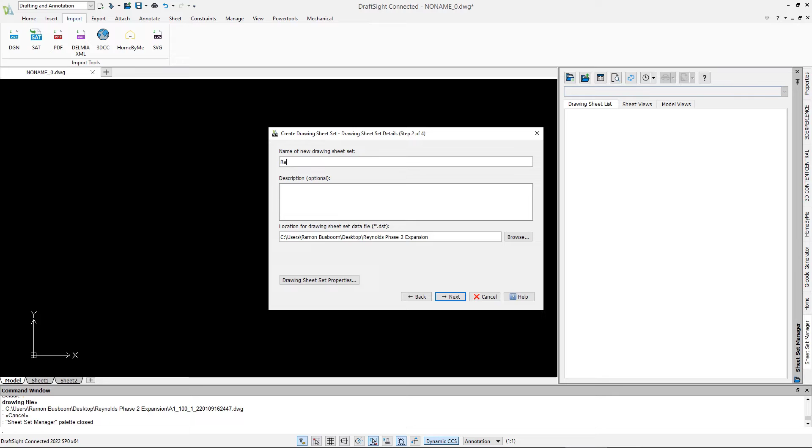So in order to help organize those, we're just going to create a new sheet set. We're going to turn on the sheet set manager, create a new one, and give it a name. We're going to do existing files, and choose that same directory, and then you can see the directories that are importing.

If you've never used sheet sets, it's a way to really help organize a lot of drawings into a set. It has some numbering capabilities. You can control properties that could be filtered down in a title box directly from here. You can rename either the drawing or even the layouts directly from here. So it's really kind of an organizational method.

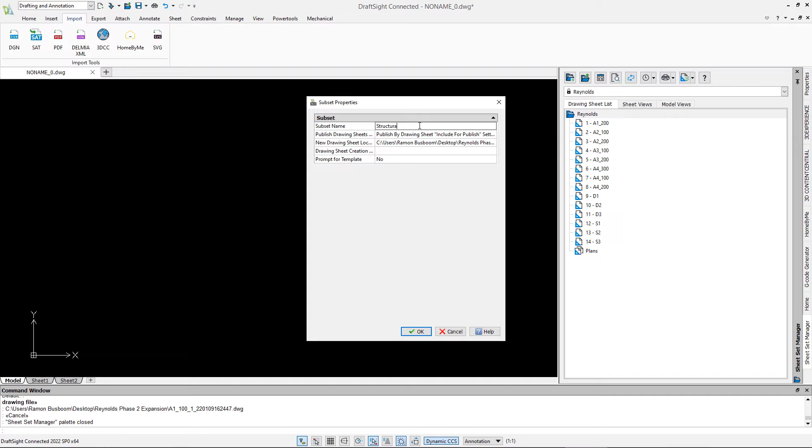In this example, I'm going to create a couple quick subsets in order to further organize this into a tree structure. If you've got multiple designers that all need these files, this is taking a little bit of workup time, but this is going to help organize all the as-is files that you receive from the builder or owner. So as you can see, this is organized now.

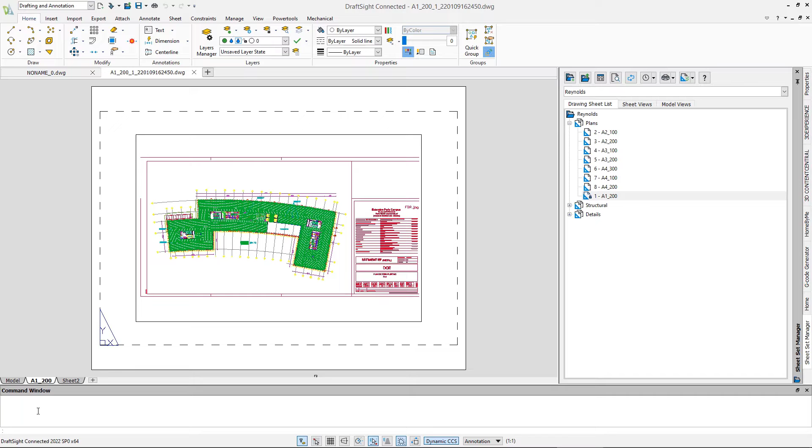Now I'm going to go ahead and open up that first drawing. It's going to open up in layout mode. Let's jump over to the model view and see what we got. So when we zoom into a little corner here, you'll notice I do have the entities. Those are just CAD entities that have been imported. The PDF layer option has definitely worked because all the PDF layers have come through.

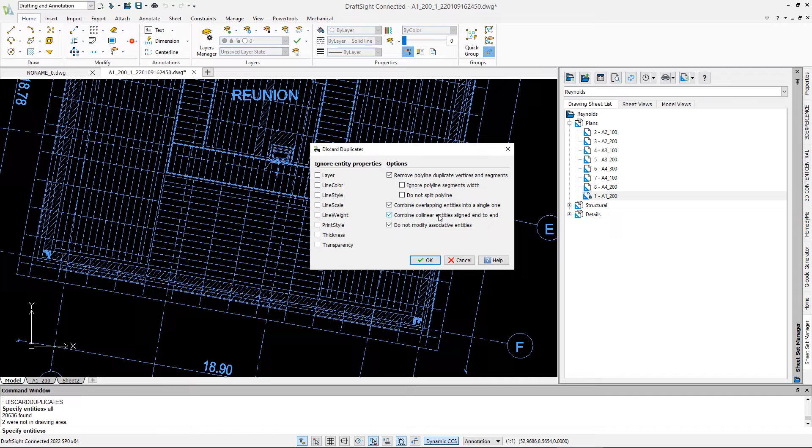Very common, again, I talked about this, is if you have overlapping entities. So what we're going to do is use the discard duplicate command. Now this is a pretty cool command because it not only looks at overlapping entities, but if you have lines that are the same but disjointed, yet aligned end to end, you can actually combine them. So we're going to go ahead and say OK to that. And if you notice the command prompt, it's removed 300 duplicates and combined almost over 500 overlapping entities for us.

All right, now that we have this kind of cleaned up, we're going to throw it over the wall to Bertrand. Thank you, Ramon, and hello everyone.

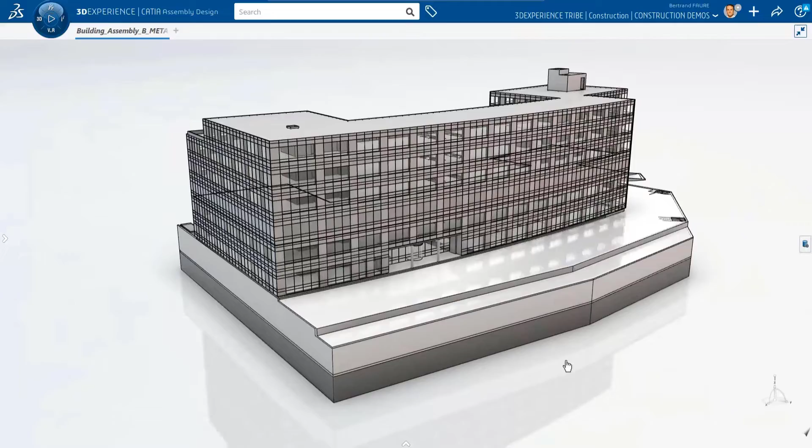What I'm showing now is the generation of the building in 3D. But before starting the geometry, it's important to explain that the data is organized in a logical way under a structure of data. And this is because many other colleagues will participate in this construction, and everyone must clearly know where he stands in the project.

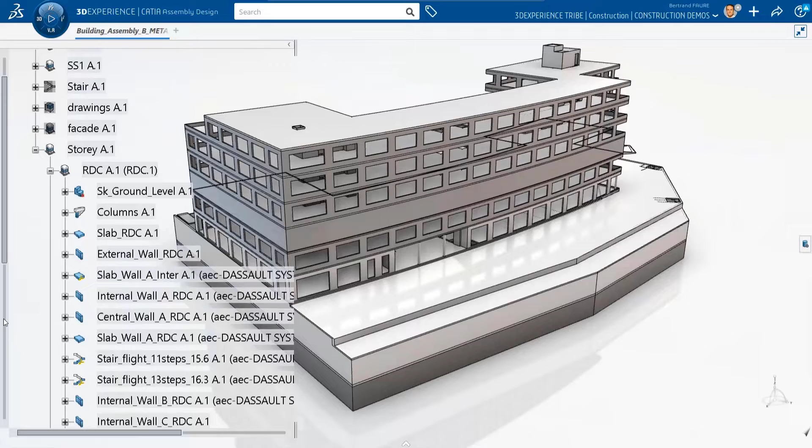And because the simplest is always the best, it's divided into stories like I'm showing now, then slab, walls, etc. Of course, the building is finished already, but I'm showing you how I would continue the modeling from the second level.

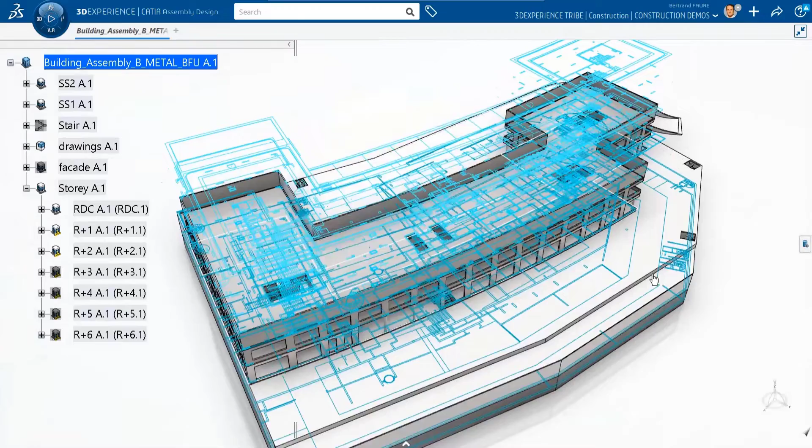What you see in blue is the different drawings imported from the architect's office and cleaned up on Draftsight. Why is it so important that the drawings are reworked? It's because they are going to be displayed in my 3D environment all together.

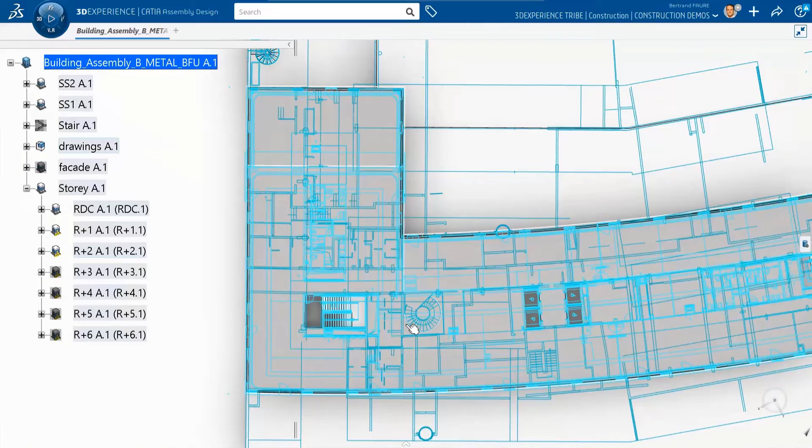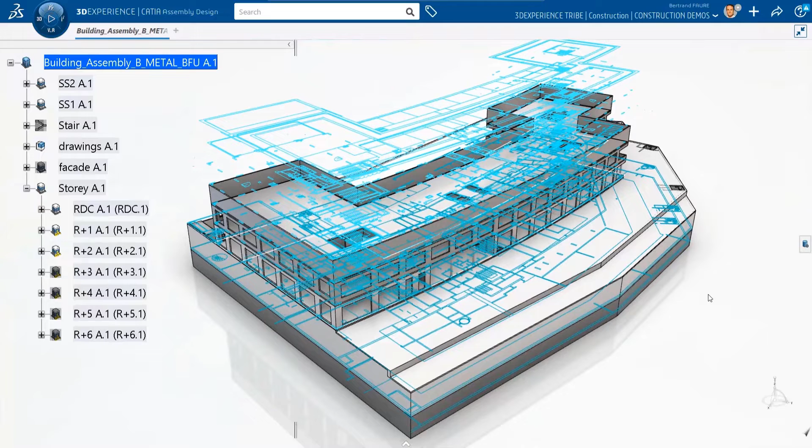For example, here all floor plans, at each level. Of course, I located them in 3D at the proper level, but still, it's going to create a very busy environment of work. And this is why it's so important that the drawings are cleaned up, so that they display properly exactly the information that is relevant for the purpose of 3D design. Of course, in CATIA, there are also filtering capabilities to help you do this work.

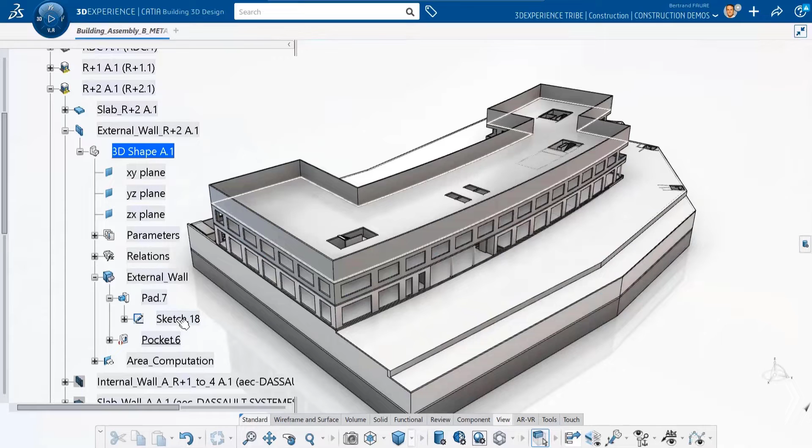The second reason why I'm so happy that Raymond cleaned up the drawing for me in Draftsight is because I'm going to use a profile to extrude the wall, for example, like I'm doing here. The 3D geometry will inherit from the quality of the profile, so the idea is to control the quality of the generated 3D. That's why it's important that the drawing is not directly the drawing given by the 2D designer, but really cleaned for the purpose of being reused in 3D.

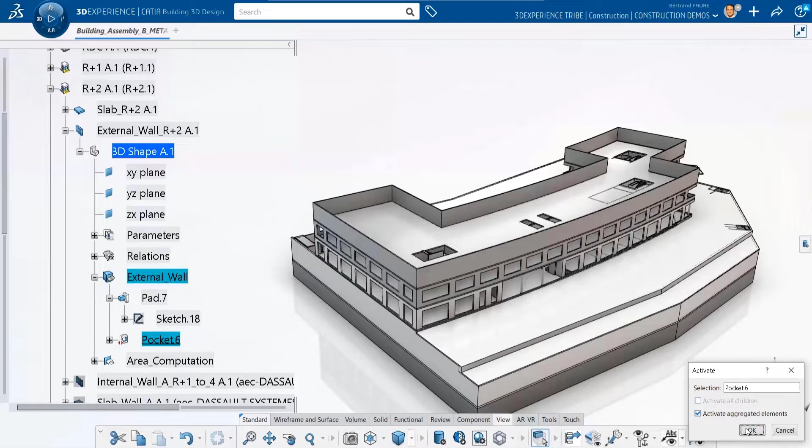Then I will continue the design with a pocket in the wall to generate the openings of the windows. And of course, there will be other 3D detailing like the internal structure walls, the vertical openings in the slab, stairs, etc.

This is the end for this step.

Thank you, Bertrand. The next use case is when the construction drawing package needs to be delivered or drafted in 2D formats like DWG. This can happen when there is a core group of designers that work in 3D and then have a drafting group that supports the conversion of this design into a set of 2D construction drawings. It also happens if you have subcontractors that might not be invested in the same BIM tools.

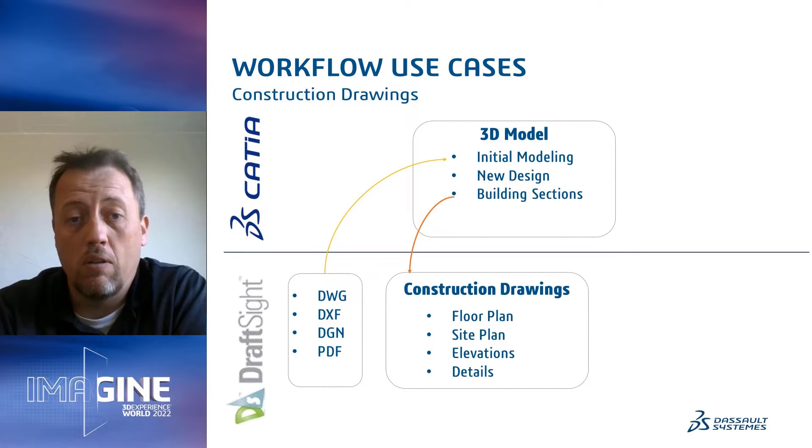So let's go ahead and take a look at first, how do we take and get information out of 3D, and then let's go ahead and finish off those drawings in 2D. Bertrand? Now I have finished detailing the second story, and this level of detail is enough to be shared to my colleague working on the 2D layouting on this level.

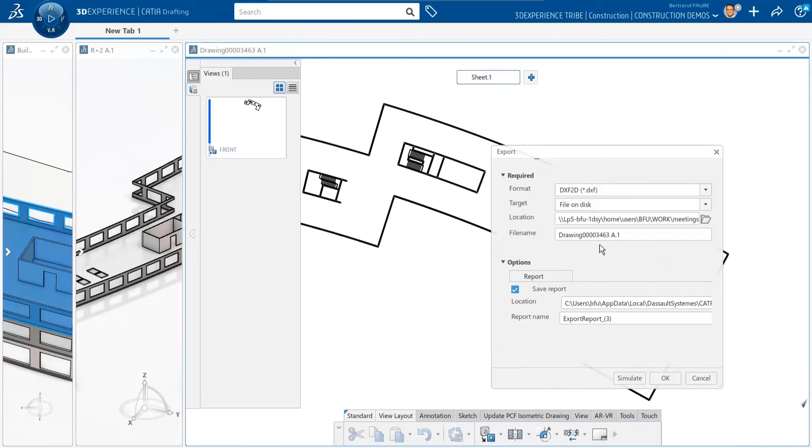So I simply create a 2D top view, and from the building I save it in database and export in the DXF format. All this in fact is a very simple operation, but there is a real value in it.

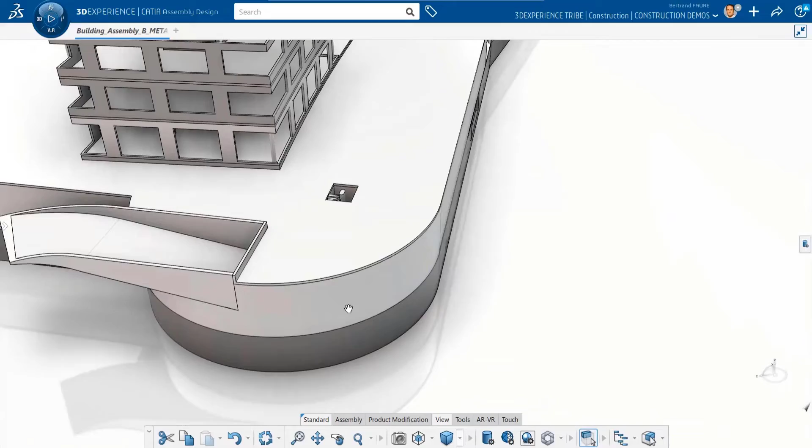In a construction project, there are plenty of reasons why 2D and 3D might become desynchronized. For example, on this model, on the very early design stage, the ramp of the parking was designed with a corner instead of an arc of circle, like I'm showing here. So it's important to reconcile 2D drawings inside a 3D environment.

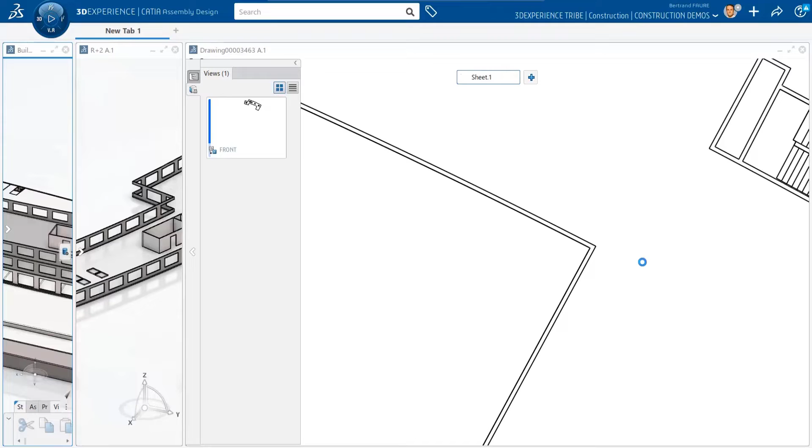And to make sure the reconciliation will work, the best is to start by a common reference drawing. This is exactly the purpose of this DXF that I'm sharing to all the 2D planners with the message, let's all work with the same reference drawing. Now, Raymond, it's to you.

Thank you, Bertrand. So here we're at the tail end of this one drawing for the floor, and what we're going to be doing is adding a couple dimensions to this wall to locate the center of this doorway. So I'm using Smart Dimension. It allows me to pick 2 points, and it can give me a horizontal, vertical, or aligned option. We're going to choose aligned, then I'm going to use the Continue Dimension command just to pick a third point and drop that last dimension in there.

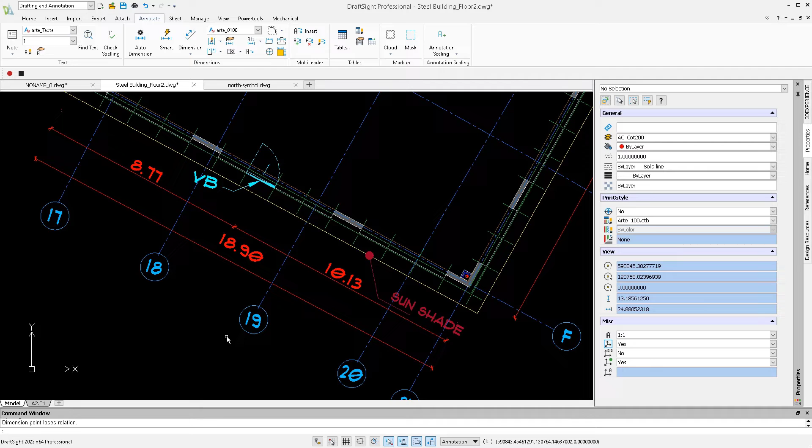So the next thing we need to do is we need to add a north arrow into this. I'm going to use Design Resources inside of DraftSight in order to go grab a lot of my common libraries and blocks. So here I've got all my arrow blocks already up. I'm just going to find the one that I want to use for this drawing, drag and drop it over, and place it.

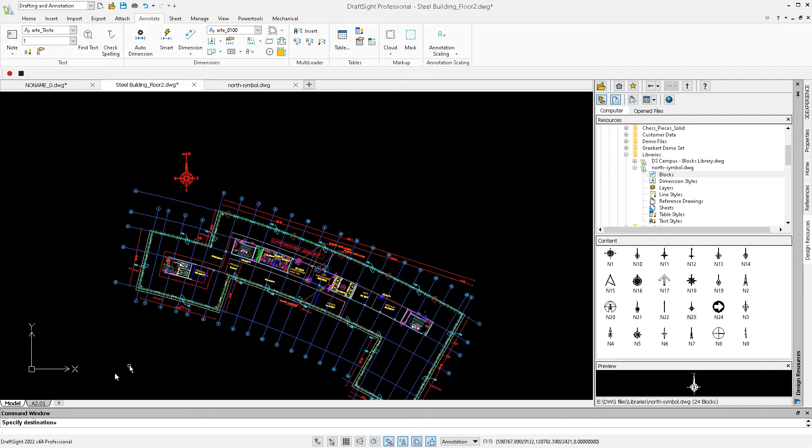You'll notice that north is going straight up on our screen. But when we go to look at the drawing and we're getting this ready to print, we want to actually orientate the building so it's a much easier view to read. So what I'm going to do is go into the viewport, and I'm going to use UCS entity. I'm going to go ahead and pick that entity, and then I can go plan view, and it will orientate this view so it's a better visual. So when I print this drawing, it will be easier to read. You can kind of see the north arrow pointing in that direction.

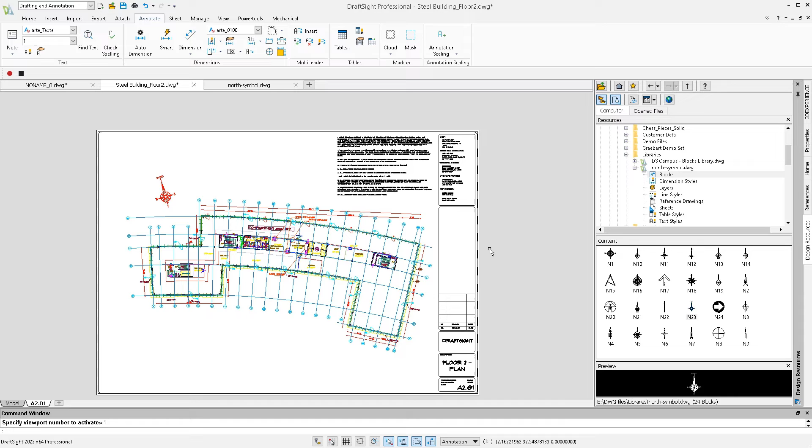Another great example of reusing the same building sections would be when they need to be sent out and coordinated with other disciplines. This is common for MEP, interior designers, or even post-construction documentation for the building ownership group. Let's see an example of that.

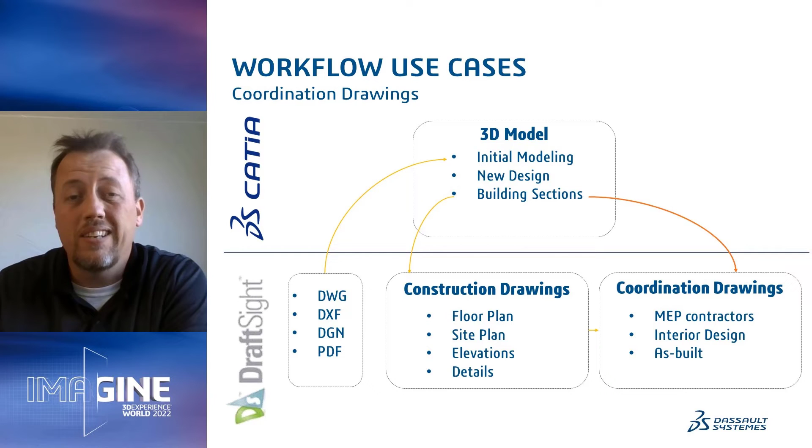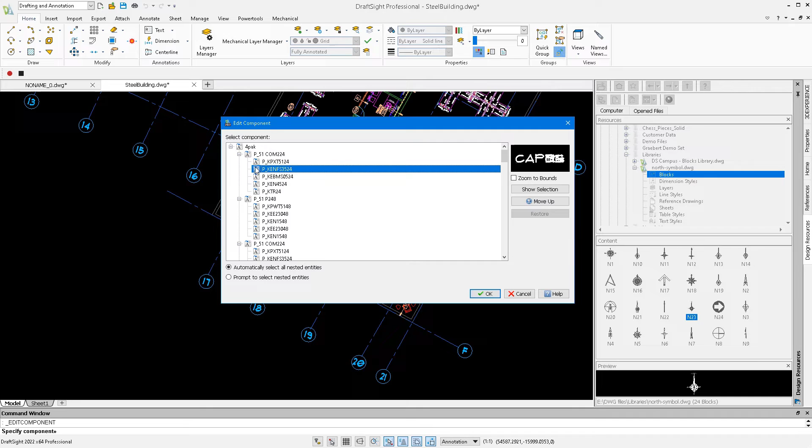These attributes act as a common data source, almost like a database inside Draftsight. If we double click on one of these cubicle designs, you'll notice we have blocks referencing other blocks in a bill of materials type format. Each of these blocks also has attributes, and we would use that information to decide what the final ordering count and cost is going to be.

So now that we have all this data from our vendor, let's see what we can do with it. The last use case we're going to discuss today is how to take externally developed data and merge it back into the 3D model. From a building coordination perspective, it's important to bring all the design data into the 3D BIM model in order to determine issues and clashes. Bertrand, would you like to show us how to do that?

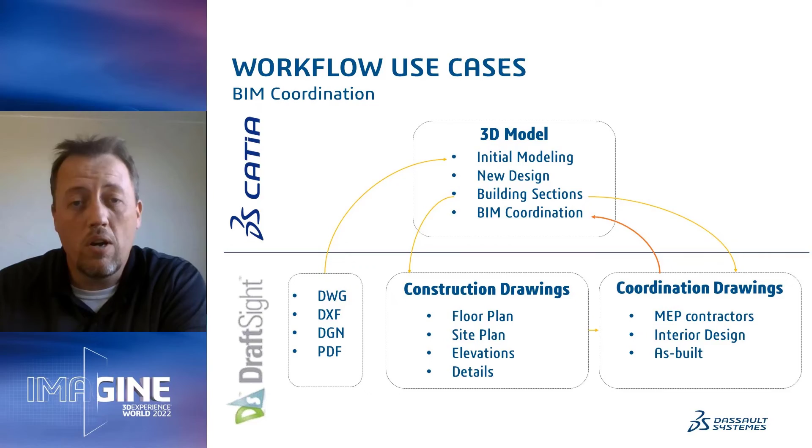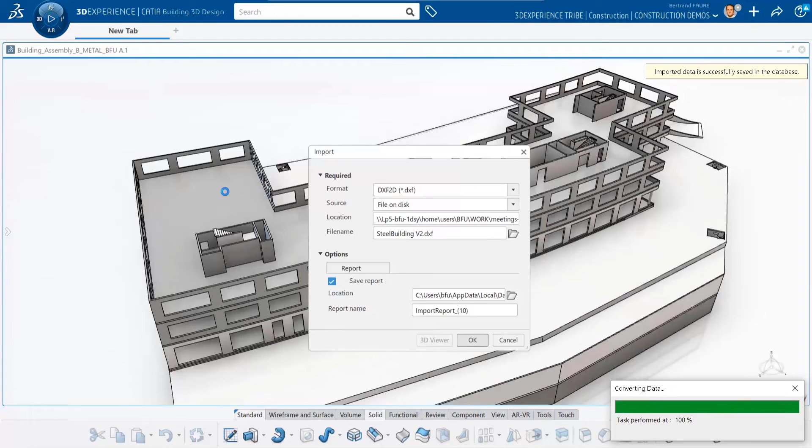Thank you, Ramon. Now we are back on CATIA, and I'm going to show how to reintegrate your drawing in 3D. The purpose here is to display the drawing information as close as possible to the 3D context. This is why I'm not putting the drawing on the Z0 plane, but made a plane close to level 2 and displayed the drawing on it.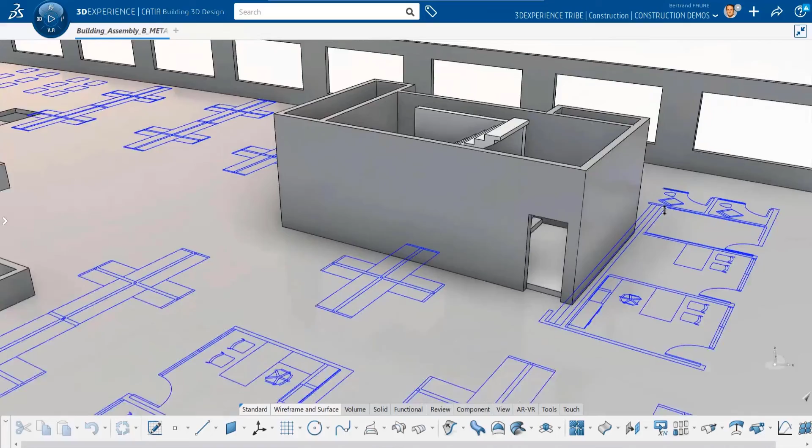So what we can see on the screen now is exactly the lines coming from the drawing. And if I want, I can hide it behind the solid elements with this option here. I can also use lines and profiles from this drawing and reuse them to build 3D geometry. So it's really able to solve the coordination issue between all the 2D drawings—visually, since they are all displayed together, it's easy to take a decision to fix issues.

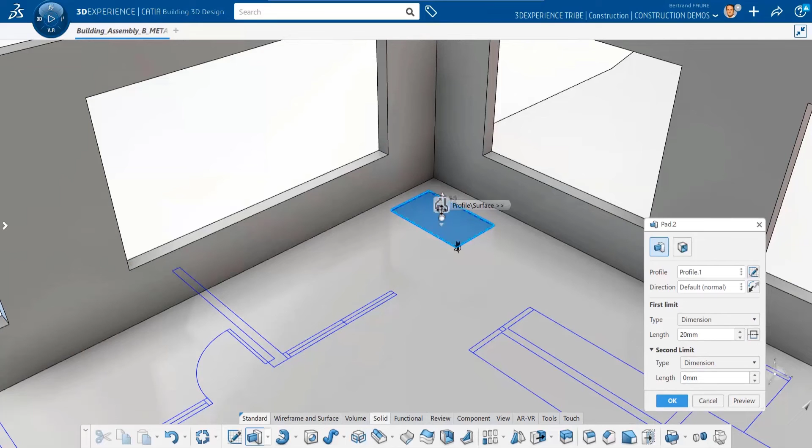And also, it's able to update the information from the drawing to build a new reference drawing to be shared again. So it's really about collecting everyone's work, consolidating information, and redistributing that information to everyone.

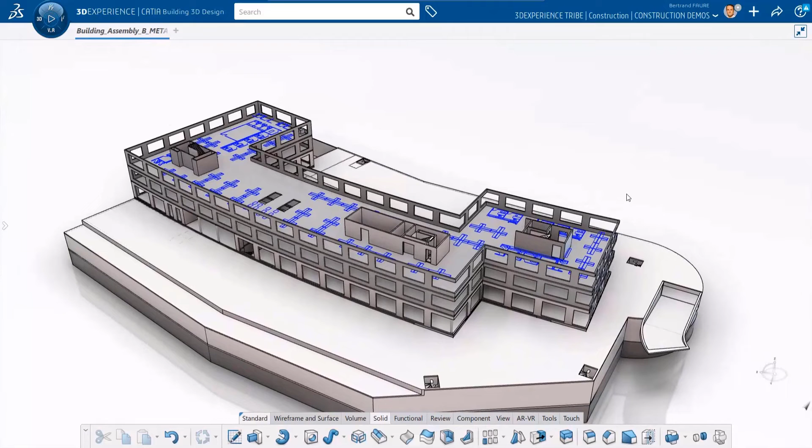I hope this little scenario gave you ideas on how to collaborate between 2D and 3D, and I hope you find inspiration. I wish everyone a good working environment, and see you soon. Bye-bye.